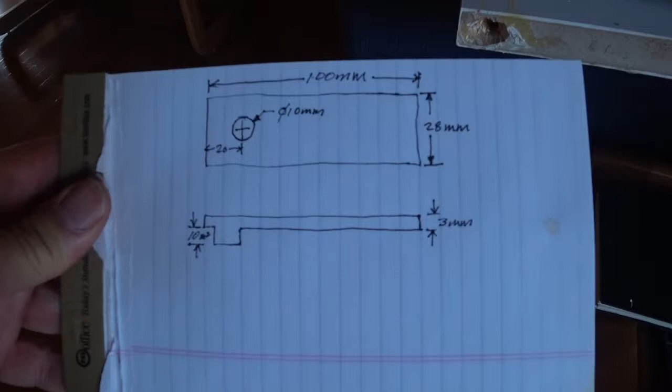All right, so here's our problem child, and here's what I've got to fix it. You see the little hole there, 10 millimeters in diameter, about 100 millimeters long, and about 28 millimeters wide, and about 3 millimeters thick. And then this part right here.

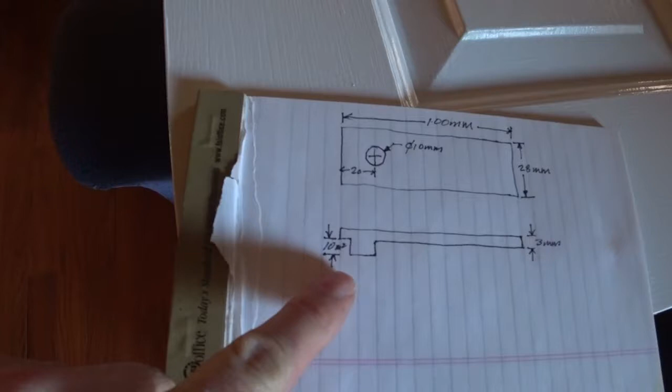Ah, damn, the phone's ringing, hang on. Okay, so where were we?

Let's see, this piece right here, this hangy down part, goes into this hole right here. And I'm going to need the peg to line up perfectly with this. So I've got my fingers crossed, we'll see.

Okay, so the first thing we have to do is get what's known as a G code, and that basically consists of loading your STL model that you just created. I used Tinkercad, and it produces what's called an STL file, and I called this a door catch. So we're going to load that.

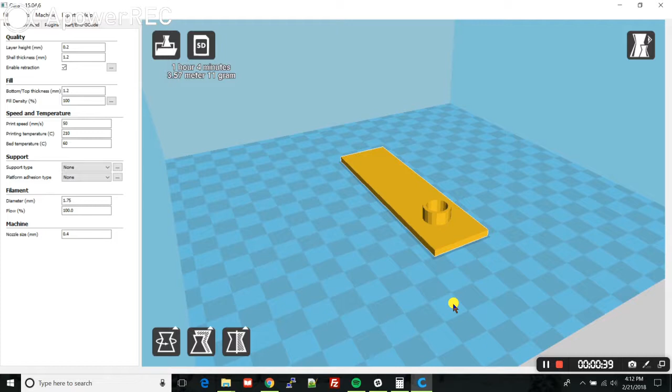And there it is. Pretty spiffy the way that creates the model here. It drops it, it bounces on the surface. Over here are all the various settings for the 3D printer.

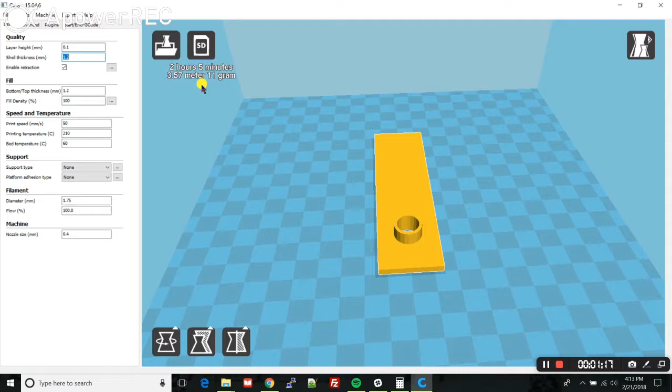I'm going to use a 0.2 millimeter layer height. Actually, I think I'm going to use 0.1, I think it looks better. So now we've extended the time from 1 hour and something to 2 hours and something, but it's going to be very strong. I'm also going to use ABS.

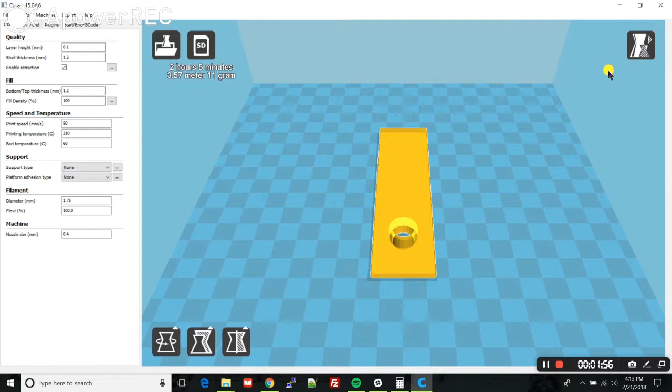Let me show you something interesting here. You can look at this model in various configurations. If you go over here to view mode, you can see it as a transparency, see right through it. Or you can look at it as an X-ray. It's kind of cute, really amazing when you've got a complex model, but this model is too simple to take advantage of it.

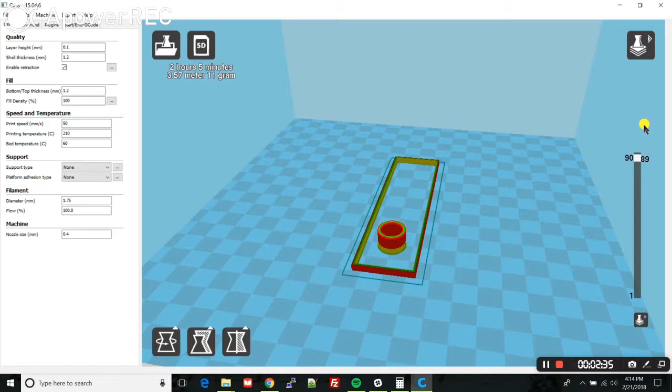But here's the most important part. Notice here it created all the layers, and here's the very first layer that it puts down. 90 layers. Let's go ahead and create the G code for this. I'm running out of time to record here. File, save G code, door catch G code. Boom, we're done. All right, we're out of here.

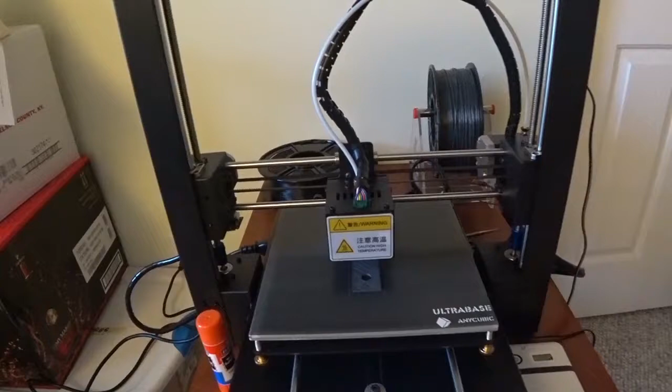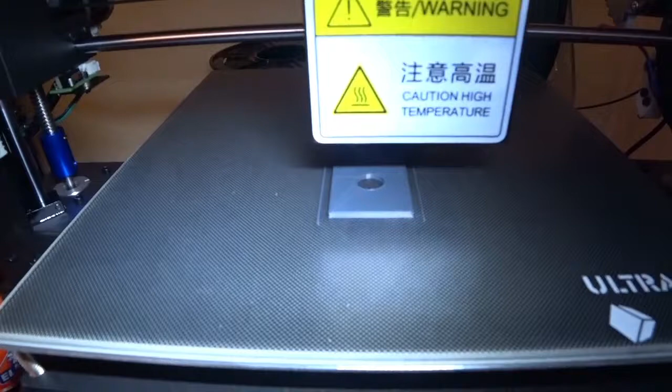Okay, our printer's been running for a little while. Let's take a look and see how it's looking here. Give it a little light there. Oh, isn't that lovely? I like that. Coming along real well. Sweet.

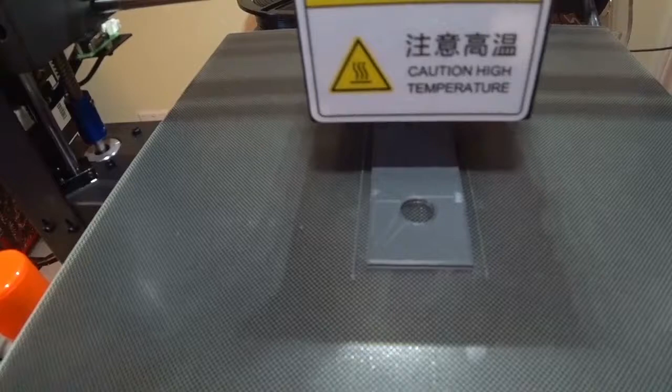That's one light, here's another light I've rigged up. I don't know how that's going to show up on here. Pretty good, shows it pretty well. Nice. Phantasmagorical. Onward and upward.

This is the peg I was talking about right here. That thing's stuck up there, I haven't been able to pull it down. I loosened this up so that it slides around, and you can adjust it back and forth that way. So I'm confident I can hit the hole that I've cut in the ABS, just because I can slide it around and lock it down with a screw.

But that's the guy that goes in there. It's looking a little worse for wear itself. Anyway, that's the challenge. I believe it popped off.

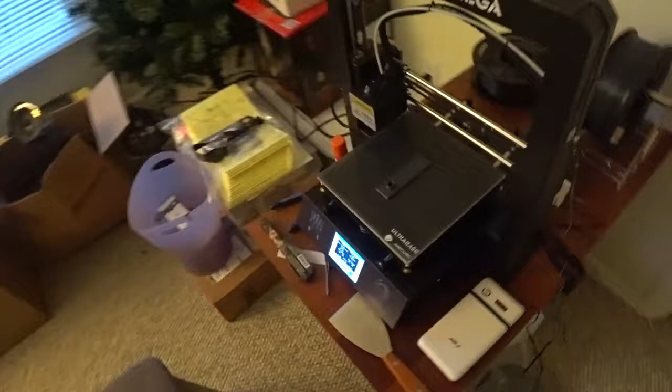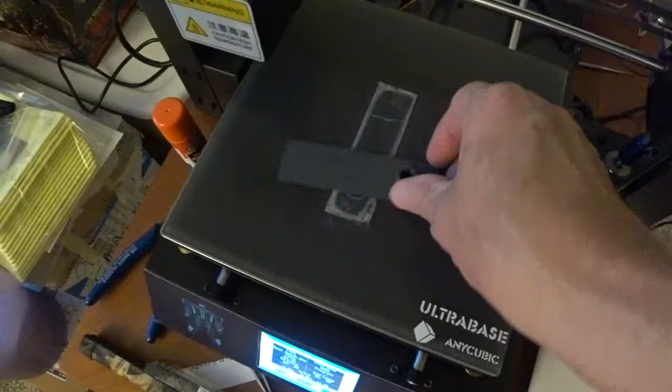Let's have a look here. Turn on some lights. Oh yeah, you can see its outline there. Very cool. Yep. Nice.

Let's take it in and give it a little wash. I put that glue on there. Wait, let's take a quick look at this first and see if we can get a good fit here.

Oh man, look at that. Is that perfect or what? Awesome. We'll put this baby in here. I've got a lot of room to maneuver there too. Great, okay, I'm going to wash it up and stick it on there.

Okay, I apologize for the bad lighting in my living room, but here's what the finished job looks like. Let me get the light on there. There you go, nice little printed piece there. See it go down inside there. Let's see if I can get some better light for you. There you go.

I like it. Now we're going to try to put it up and see what happens. This is the real test. There it is, sitting up there, sweet as can be. Now watch this, I don't know if I can pull back far enough. Observe this. Wow.